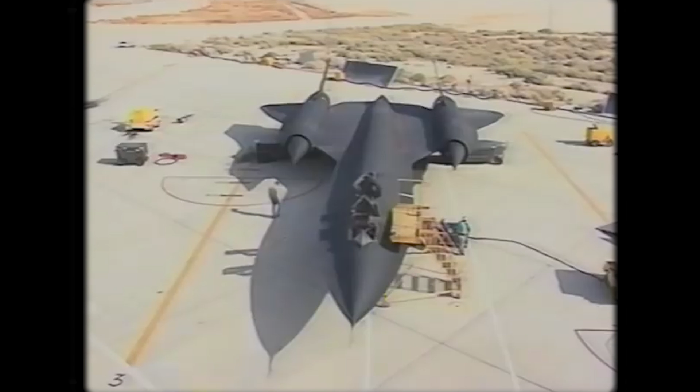The juxtaposition between this dated footage and the futuristic plane is strange. It's hard to believe passengers 40 years ago, in a time when colour TV was a luxury, were flying across the Atlantic at twice the speed of sound. The Concorde was well ahead of its time, an anomaly in the history of commercial travel, a byproduct of misguided government funding, a joint venture between Britain's BAC and France's Aerospatiale, and its development funded entirely by the British and French governments to the tune of $2.8 billion. The Concorde's legacy is marred by its commercial failure, but this engineering marvel was a triumph of ingenuity. Nothing remotely close to it had flown before, and nothing like it has flown since, turning what had been a military-only technology into a luxury flying experience required innovative thinking. This is the insane engineering of the Concorde.

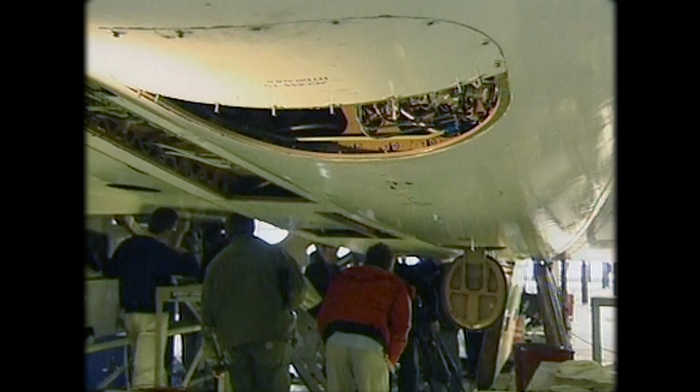The engineers of the Concorde had several unique challenges. Developing a supersonic plane is difficult enough with military design requirements, but developing a supersonic plane that would satisfy the wealthy customers it intended to serve is an entirely different ballgame.

Aerial refueling makes fuel efficiency a secondary concern for the military. The comfort of the plane's passengers is an afterthought at best, and the price tag attached to these often limited-run specialty planes is beyond the budget of a commercial airline. Those needs are reflected in the Concorde's unique design.

A sleek exterior hiding powerful engines, developed from the iconic British warplane, the Avro Vulcan. Fuel efficiency and supersonic flight are two opposing ideas, but these engines, the Rolls-Royce Olympus 593, when flying at Mach 2, were the most efficient engines ever created.

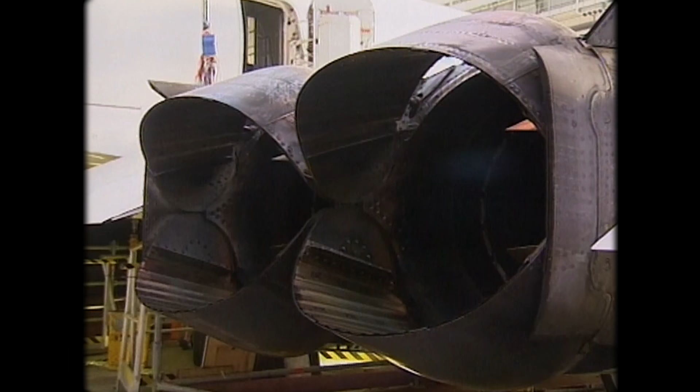These engines, when introduced for the Avro Vulcan, were capable of generating just 49 kilonewtons of thrust, but over the course of their adaptation for use in the Concorde, increased in thrust by over triple to a whopping 169 kilonewtons. 20% of this thrust increase was provided by newly fitted afterburners, a technology typically reserved for military planes.

Afterburners work by injecting fuel directly into the superheated and high-pressure exhaust of the turbine section. Despite this air's journey taking it through the combustion chamber, only half of the oxygen in the air is consumed, leaving untapped energy in the exhaust of these engines. To capture this energy, fuel can be injected directly into the exhaust of the turbines and ignited, basically acting like a rocket stage of the engine, causing further expansion and acceleration of the exhaust through the exhaust nozzle.

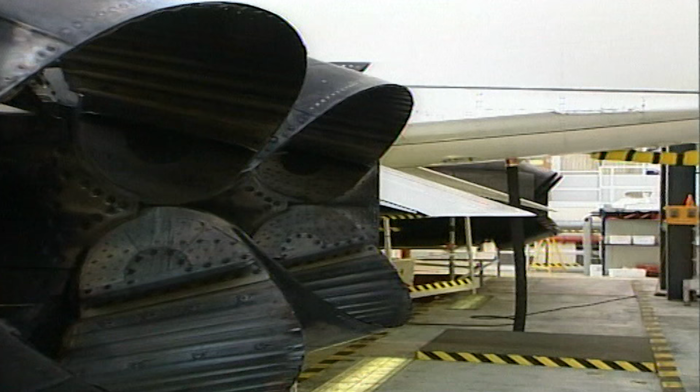However, this system is useless without a controllable nozzle. Typical airliner engines have a fixed nozzle, because these aircraft are expected to be efficient at a relatively low range of subsonic speeds. But the Concorde, with its massive range of speeds, needs not one, but two controllable nozzles to adequately control the engine's power.

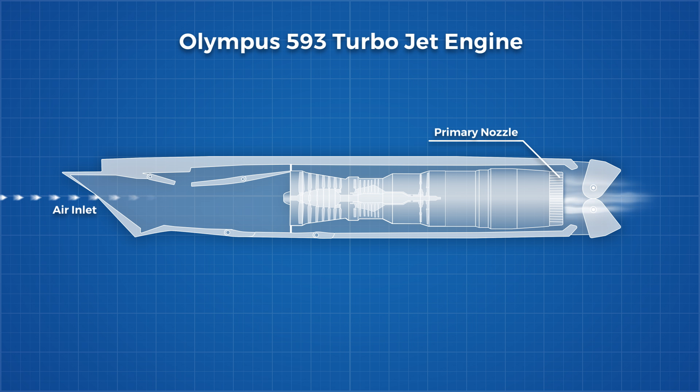The primary nozzle connects directly to the jet pipe's exit and consists of petal-like structures that can close or open to vary the diameter and therefore the area of the jet's exit.

When the afterburner, or reheat as the British engineers called it, was ignited, it caused a massive increase in pressure at the engine's exhaust. This increase in pressure could cause choked flow in the engine, where high pressure zones ahead of lower pressure zones will prevent air from flowing through the engine correctly. To prevent that, the primary nozzle opens wider when the afterburner is active to decrease pressure and ensure the mass flow rate through the engine is unchanged.

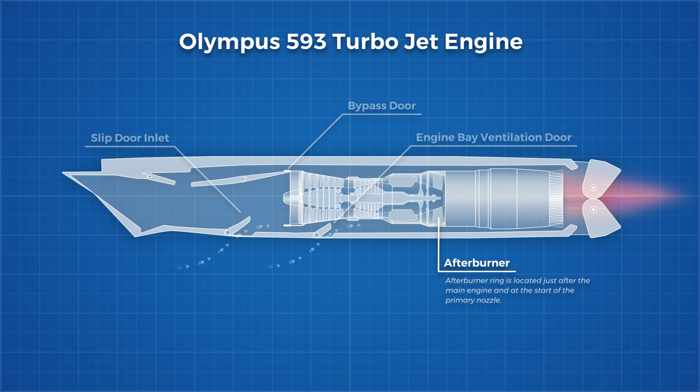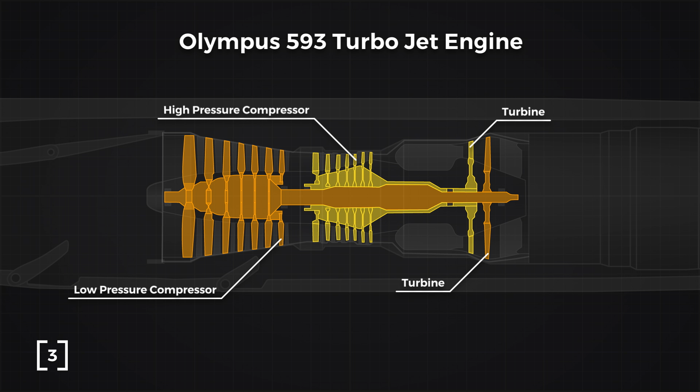However, at times, we do want to affect the flow upstream of the nozzle. The Olympus 593 was one of the world's first two-spool engines, predated only by the Pratt & Whitney J57 engine by just a couple of months. Two-spool means the engine contained two compressor sections driven by two turbine sections, each acting on their own concentric drive shafts, allowing the two sections to operate at different rotational speeds.

When the primary nozzle was actuated, the varying nozzle pressure caused the low-pressure spool to either spin faster or slower, thus providing control of the engine to ensure it can perform at its optimum speed across its wide speed range.

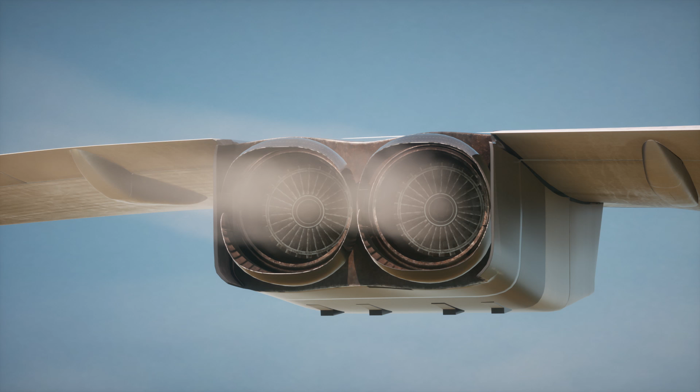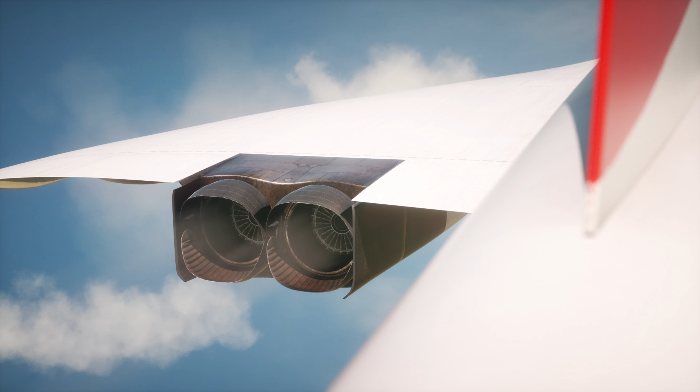The secondary nozzle function is just as complex. The eyelid doors look like some kind of steampunk blast shield, and for good reason. The force these secondary nozzles had to endure influenced their appearance, withstanding huge forces at both supersonic and subsonic speeds, and they could even close completely on landing to function as reverse thrusters.

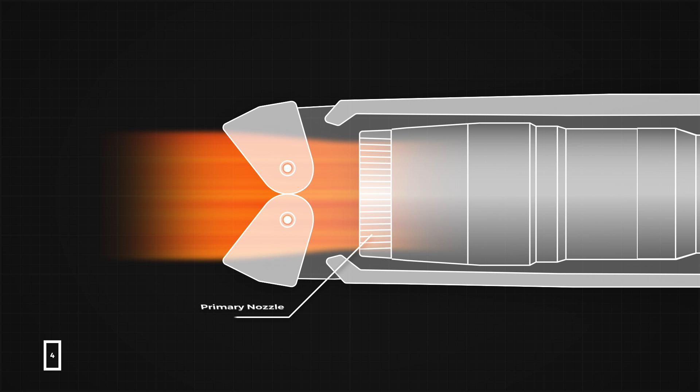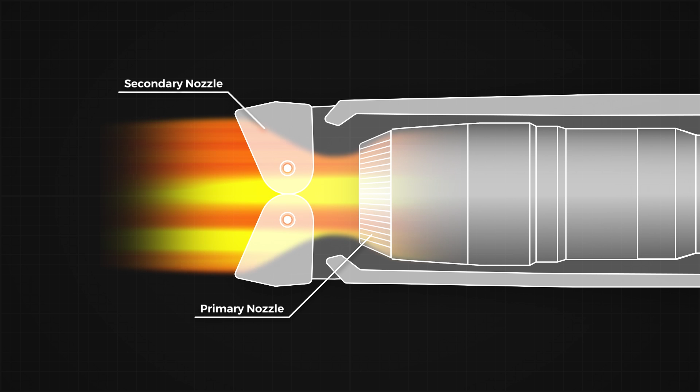By actuating these nozzles, the plane could carefully manipulate the exhaust velocity and thus maximize thrust, because together the pair acted as a controllable converging-diverging nozzle.

Converging-diverging nozzles are typically used in rockets to accelerate the combustion products to their optimum speed and pressure. The opposite shapes are needed because air acts completely differently at subsonic and supersonic speeds.

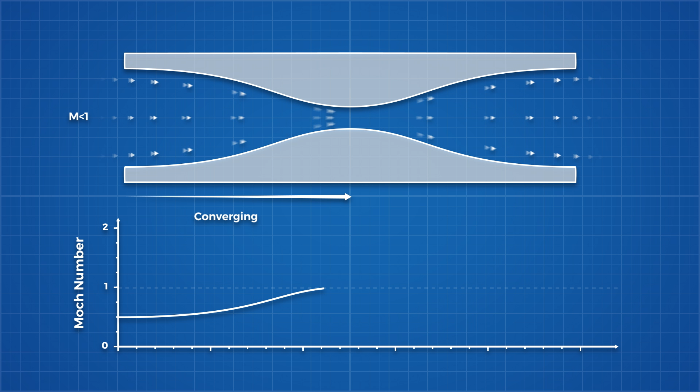For example, when subsonic air travels through a converging duct, it speeds up as the cross-sectional area decreases until some critical area, which is referred to as the throat. This is where Mach 1 would be reached. At this point, no further acceleration of air can occur as the flow is choked.

Now, as you would expect, if that same subsonic airflow went through a diverging duct, the air slows down as the duct area increases. This is Bernoulli's principle at play.

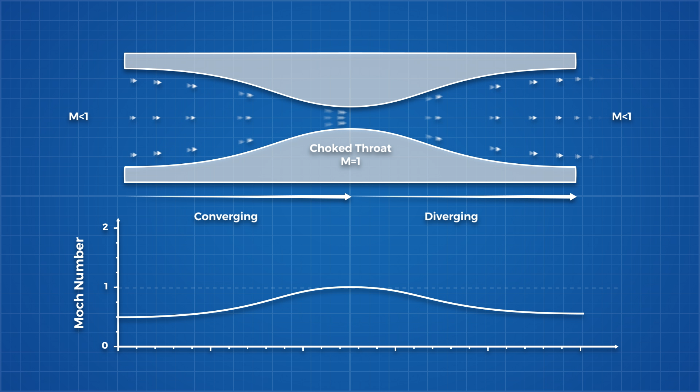The bizarre thing is, the exact opposite occurs when air travels at supersonic speeds. A converging duct will result in a decrease in velocity, and a diverging duct will result in an acceleration.

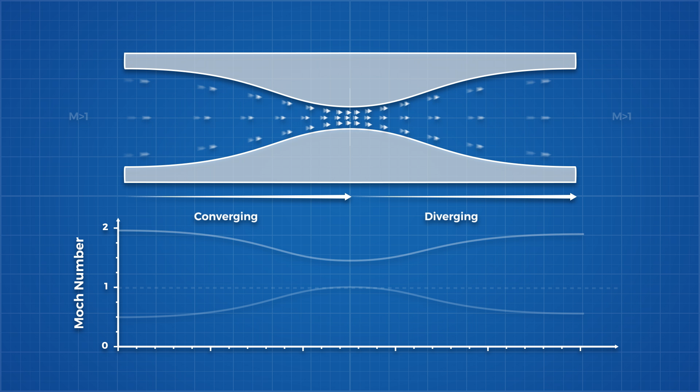So, in order to maximize the acceleration of our exhaust gases, we want to pass our subsonic air from the engine first through a converging nozzle, the primary nozzle, until it reaches Mach 1 at the throat.

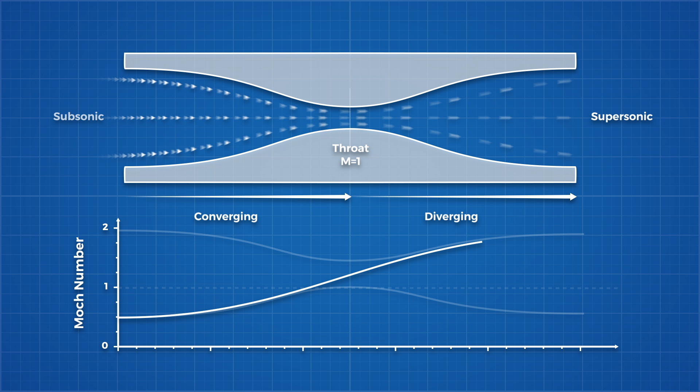Then we want it to pass through a diverging duct, the secondary nozzle, at supersonic speeds so it can continue to accelerate. These paired nozzles allowed the Concorde to carefully optimize the nozzle profile for different flight conditions, a marvelous piece of engineering. The same principles were used for the inlet.

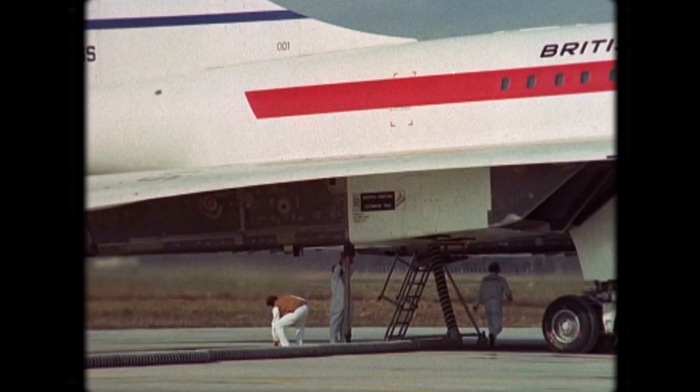No engine can operate with supersonic flow. The shockwaves that would form inside the engine would cause all kinds of chaos. So the Olympus 593 needed some way to decelerate the supersonic air entering its unique square inlets. These squared inlets were designed to simplify the complicated task of creating nice laminar subsonic flow for the engine's compressors.

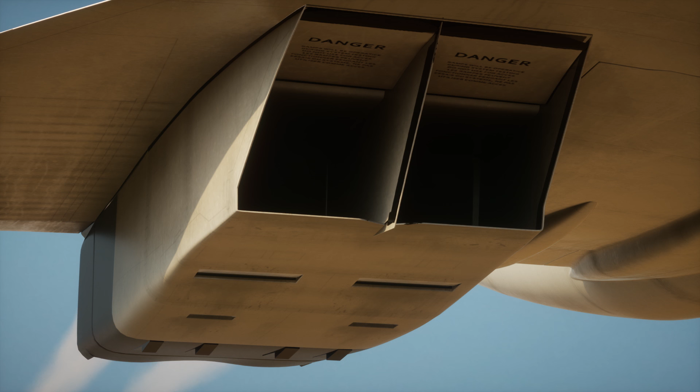Inside were a series of ramps and doors that could open and close depending on the flight regime the intake was encountering. At takeoff, the engines required all the air they could get to accelerate the plane enough to get those cumbersome delta wings to generate enough lift to take off.

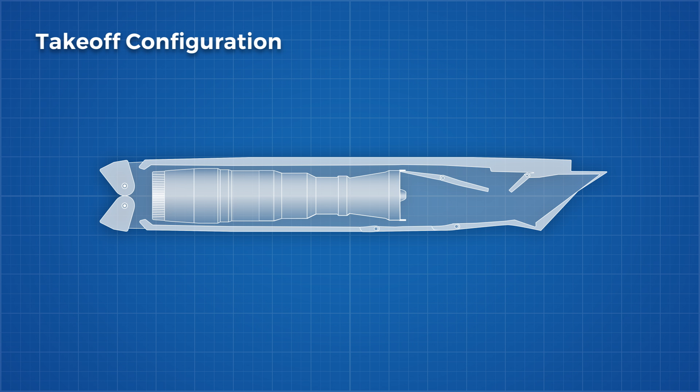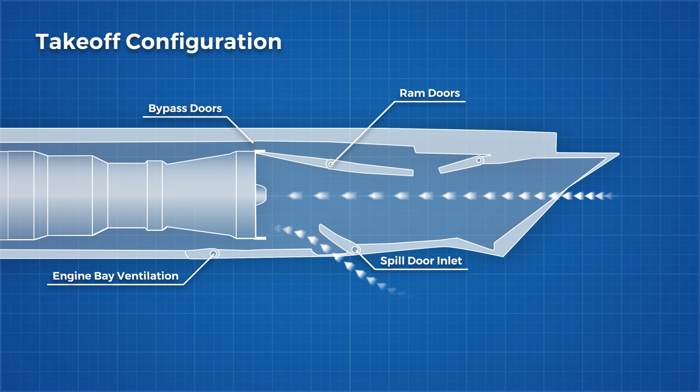To funnel as much air as possible into the engine, the two variable ramps were retracted into their closed position. A spill door in front of the engine intake was held open to allow additional airflow into the engine, while two bypass doors, which controlled the air around the cooling passage around the engine, were also closed.

The afterburners were also active during takeoff, but soon after, the Concorde was required to enter a noise abatement stage of flight, where the afterburners were turned off and power was reduced as the plane climbed.

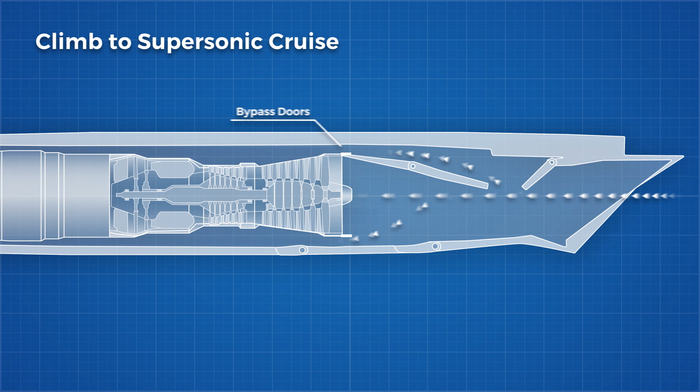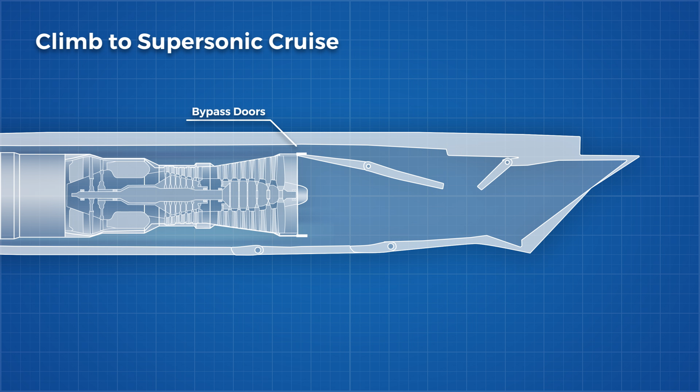At this point, the bypass doors open to allow for cooling air to travel along the outside of the engine. As speed increases, the primary and secondary nozzles adapt, gradually beginning to form the ideal converging-diverging nozzle for supersonic cruise. Parallel to these changes in the nozzles, the inlet ramps actuate to create a converging inlet that slows down and compresses the supersonic air entering the engine.

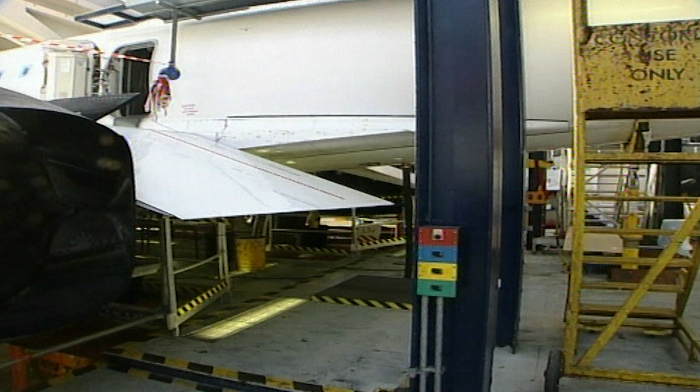The fuel consumption of supersonic flight is massive, but that is primarily driven by aerodynamic drag, not thermal efficiency. This supersonic air being rammed and compressed into the engines helps the engine immensely in achieving its high thermal efficiency.

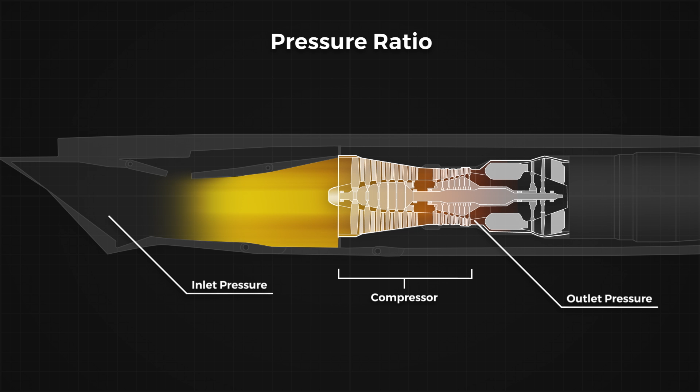Thermal efficiency in jet engines is largely determined by the pressure ratio achieved by the engine. That is the ratio of pressure between the inlet of the engine and the outlet of the compressor, which, in the case of the Concorde flying at cruise, is 80:1, an incredibly high pressure ratio. The highly efficient GEnx engines of the Boeing 787 only manage 58:1.

The Olympus 593's two spools each contained 7 compressor stages, each driven by a single stage turbine.

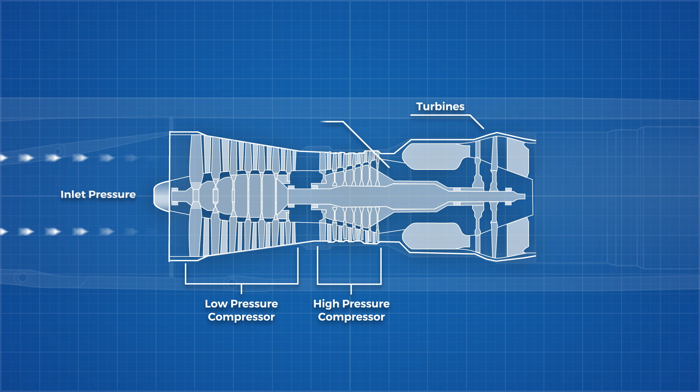The low pressure and high pressure compressors together provided a pressure ratio of 15.5:1, a moderately high pressure ratio that would provide moderate efficiency at subsonic speeds.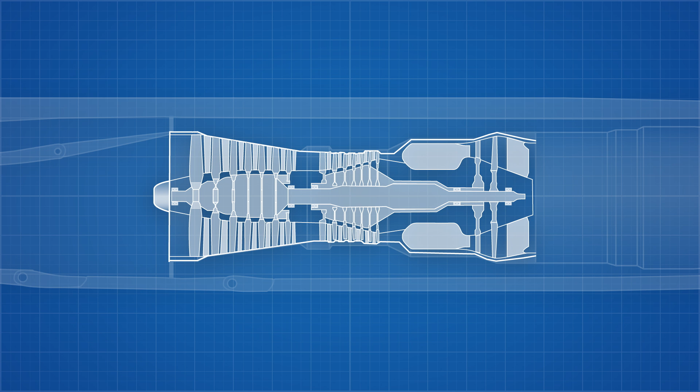However, the pressure ratio multiplied to 80:1 at cruise as the supersonic air rammed into the unique square inlet engines. This elevated pressure ratio resulted in extreme temperatures inside the engine that necessitated the use of high-temperature alloys typically reserved for the turbine blades.

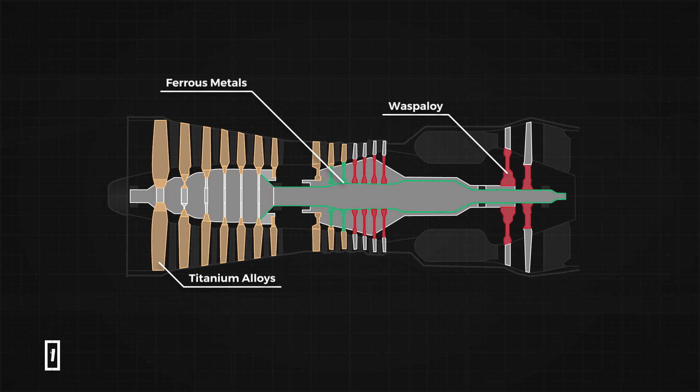Titanium blades were used for the early compressor stages, and high-temperature nickel alloys were used in the even hotter later stages. Cooling the driveshaft bearings became another engineering challenge. Increasing the mass flow rate of cooling oil was not enough to keep the bearings within a safe operating temperature.

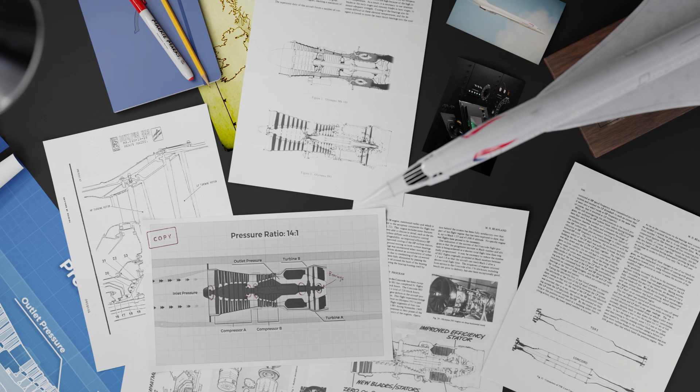Looking at the differences between the original Olympus engines used in the Avro Vulcan and the Concorde hints towards some changes the engineers were forced to make. A center bearing located immediately after the high-pressure compressor here no longer exists in the Olympus 593, and the driveshaft preceding it takes a bottle-like shape, increasing in diameter in the new gap between bearings.

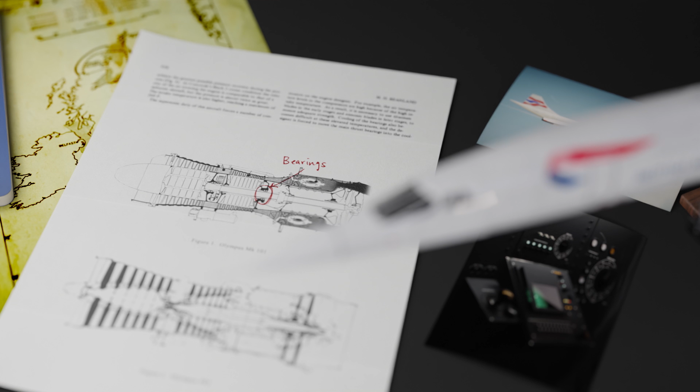This center bearing had to be removed because the temperatures were too high in this location directly after the high-pressure compressor. But without the support of the bearing, the driveshaft became too flexible. To accommodate this change, the driveshaft needed to increase in diameter to increase stiffness.

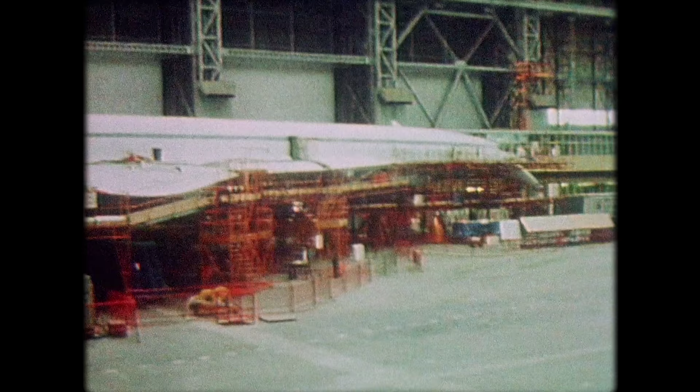The Concorde is full of strange little design details like this, solutions to unique engineering problems caused by the immense cruising speed. In order to decrease fuel consumption as much as possible, the front area of the plane needed to be minimized. Delta wings allow wing spans to be decreased dramatically and reduce the drag created in supersonic flight. However, it creates some issues for low-speed flight, where they struggle to generate enough lift, making takeoffs and landings difficult.

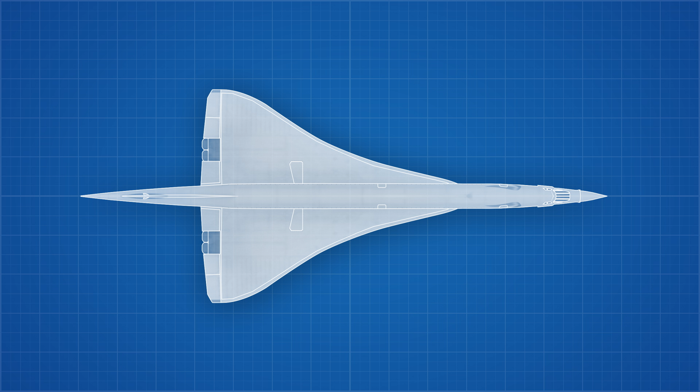This is where the Ogival delta wings of the Concorde come into play. This is a form of compound delta wing where there are 2 sections to the wing, with the forward section having a higher sweep angle than the rear section, connected with an ogee curve, going from concave to convex curves smoothly. This shape allowed the Concorde to generate additional lift at low speeds through the use of vortex lift.

When flying at high angles of attack, separated airflow would roll over the wings to form 2 stable cone-shaped vortices, where airspeeds were high and air pressure was low, effectively creating lift.

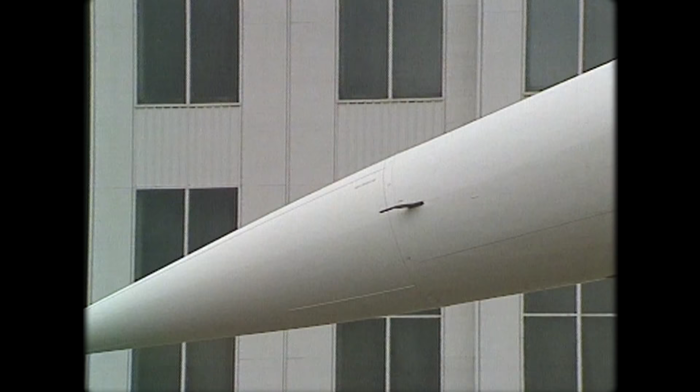However, those high angles of attack needed for low speeds created some serious visibility problems for the pilots, whose cockpit would have had a lovely view of the sky if not for the iconic droop snoot. The droop snoot is a one-of-a-kind solution, a mechanized nose that could drop by 12.5 degrees to provide the pilots a clear view of the runway during these high angle of attack maneuvers.

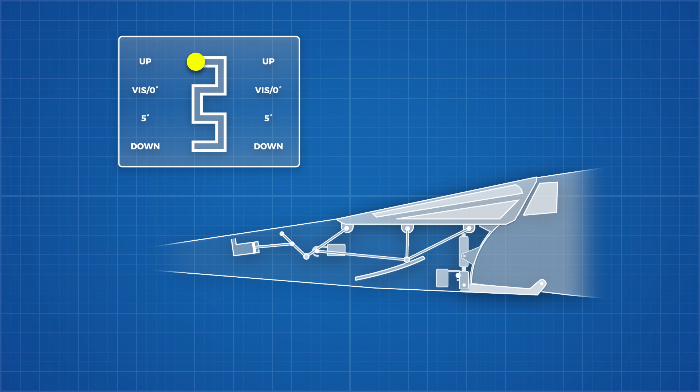The mechanism had 4 positions, controlled by the pilot with this lever. The top position was the fully retracted position used in supersonic flight.

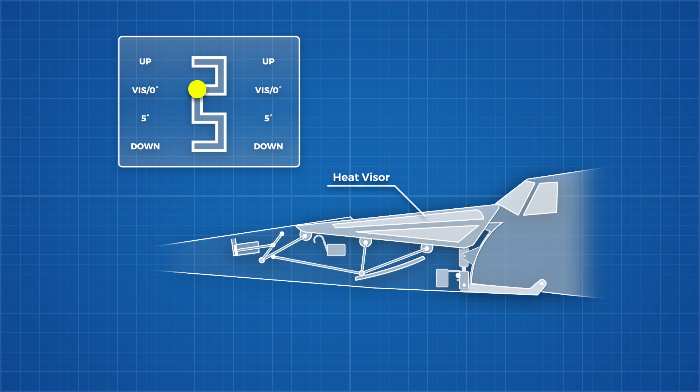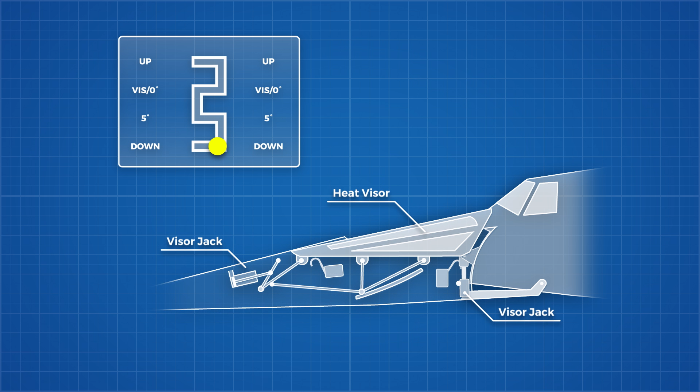The second position lowered a specialized heat shield visor used to protect the cabin windows from the heat of supersonic flight. When placed in this position, the visor hydraulic actuator would retract, causing the visor to retract into the nose fairing. The next position was the 5-degree down position used for takeoffs and taxis, extending this hydraulic actuator, and the final setting pushes the nose down further into the 12.5-degree setting needed for landings.

The plane also had an extendable tail landing gear, which on most takeoffs and landings was not needed, but was present to protect the plane's engines, which would be the first point of contact for what would normally be a tail strike for other airliners.

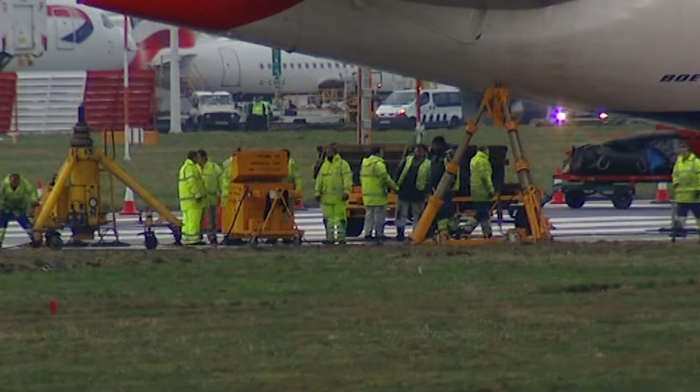Tail strikes aren't all that uncommon, usually happening on landings in difficult conditions. Some planes, like the 777, also have extendable protection measures in the form of tail skids, as a strike can, at best, force a plane into maintenance, costing the airline company money, or, at worst, cause serious damage to the pressure bulkhead and put the lives of the passengers aboard at risk.

In fact, a tail strike is responsible for the crash that claimed the most lives out of any single aviation crash in history. In 1985, a Japan Airlines 747 flight crashed in the mountains of Japan, 7 years after a tail strike had occurred, which had not been correctly repaired. With the high angles of attack demanded by the Concorde for landings, this protection was vital to keep the plane safe.

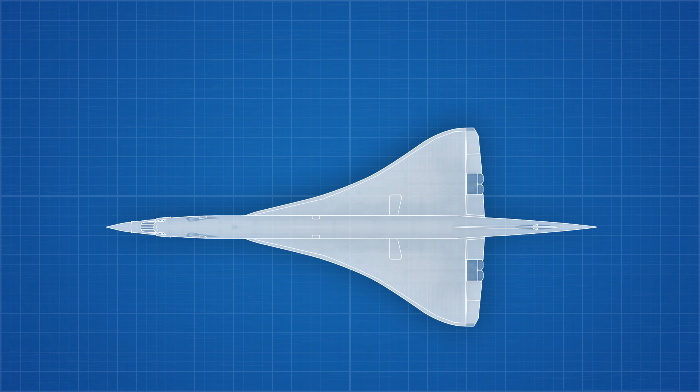The visor was needed during supersonic flight because the nose of the plane experienced temperatures of around 130 degrees Celsius, while cruising at an altitude of 60,000 feet, where ambient temperatures are usually around minus 56 degrees Celsius.

The Concorde went through several design iterations with this forward-facing protection. The earliest prototypes simply removed the lower forward-facing windows completely. But it turned out that pilots like having a view of where they are going, so this wasn't an option for the full production model.

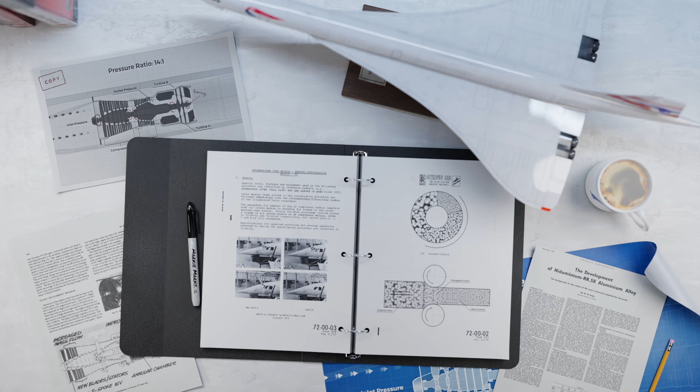However, a version of the droop snoot with a fully metal heat shield was originally considered for the Concorde, which would have eliminated forward visibility during cruise, which was considered non-essential. But thankfully, these heat-resistant glass visors were used in the final version.

Working with such high temperature variations between takeoff and landing causes some serious structural issues, especially with the frequency of flights needed to make a commercial plane financially viable. The thermal expansion caused by these temperatures made the plane grow by 20 centimeters on each and every flight. The fatigue this thermal stress could cause would eventually result in catastrophic failure if not properly accounted for.

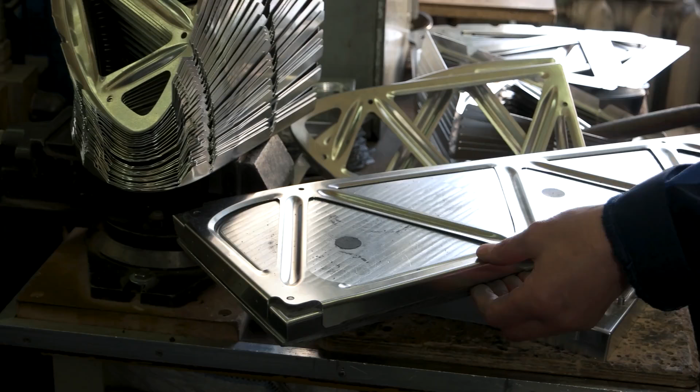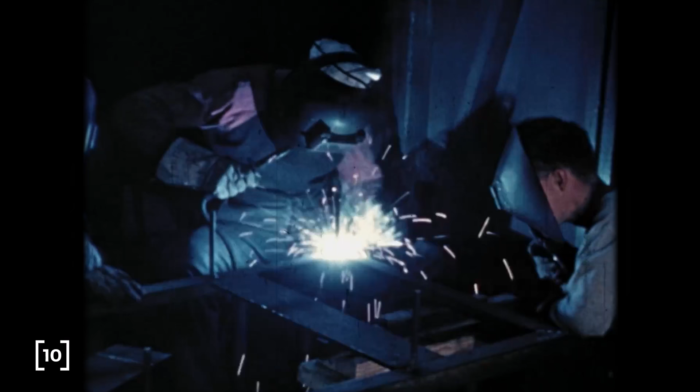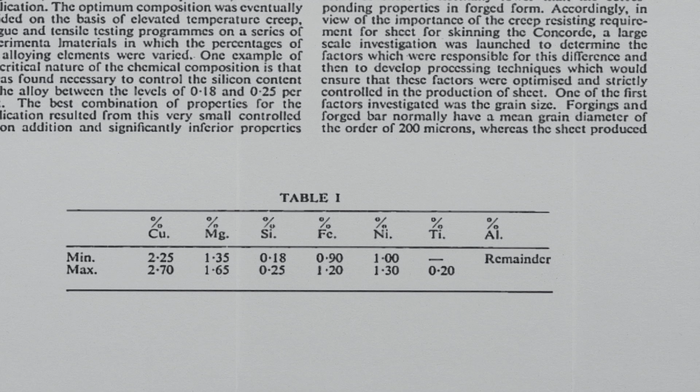The first issue was finding a material capable of dealing with this heat. Titanium, which was used for the SR-71, could have been used, but due to its cost and weight was ruled out early. Traditional aluminium would not be capable of withstanding these conditions, but a special aluminium alloy, Hiduminium RR58, developed in Britain during World War II for the newly invented gas turbine engines, could. The alloy consists of copper, magnesium, silicon, iron, nickel, and titanium, with the remaining percent being made up of aluminium.

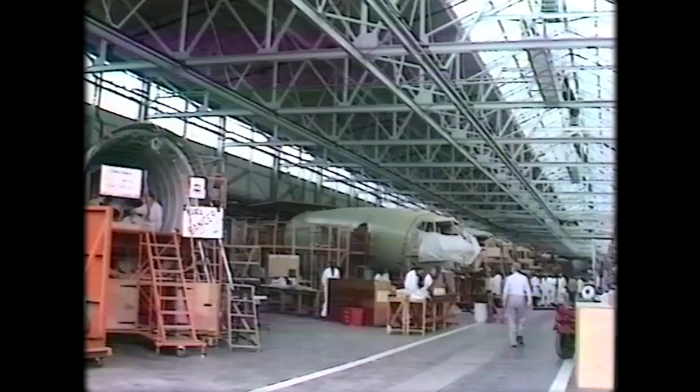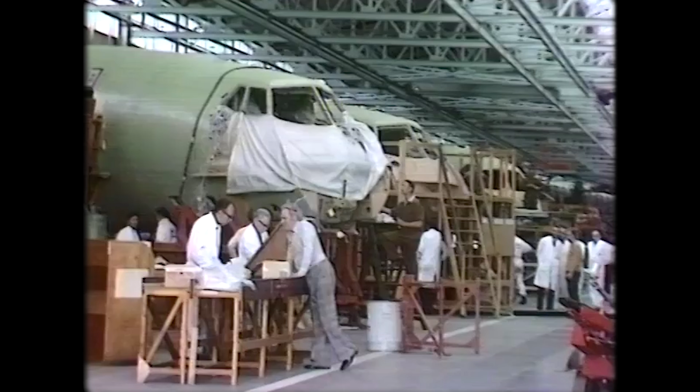Although this material had been developed decades prior to the Concorde, it had never been used in this application. With lower average temperatures than its traditional use inside gas turbine engines, but much longer life requirements, the parts would also be manufactured using different techniques, like the cold-rolled sheets needed for the fuselage. This one process alone affected critical material properties that reduced heat resistance.

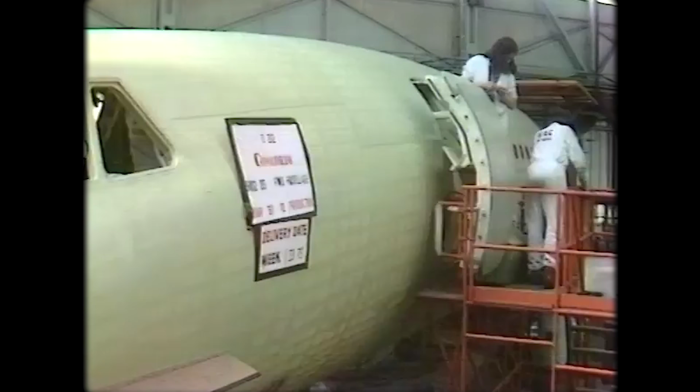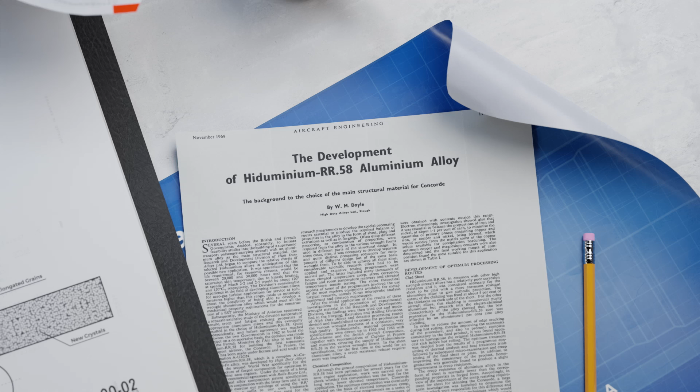Forged parts tend to have larger crystal grain structures than rolled components, which helps forged components resist the internal crystal structure from creeping when under stress and heat. To adapt this material for the cold-rolled skin of the Concorde, the engineers at Rolls-Royce had to develop new manufacturing methods to maximize the grain size of these cold-rolled components. Manufacturing knowledge that has no doubt been used by Rolls-Royce for modern-day applications.

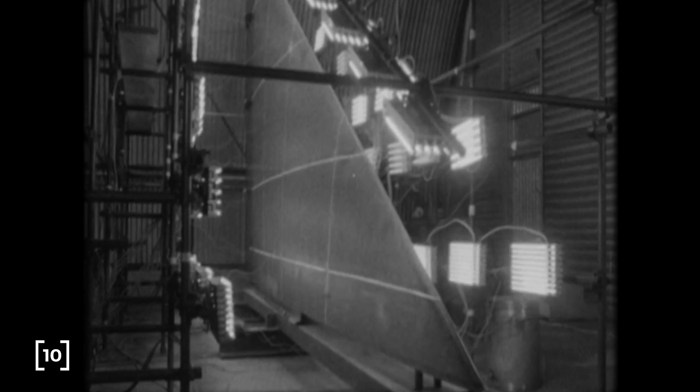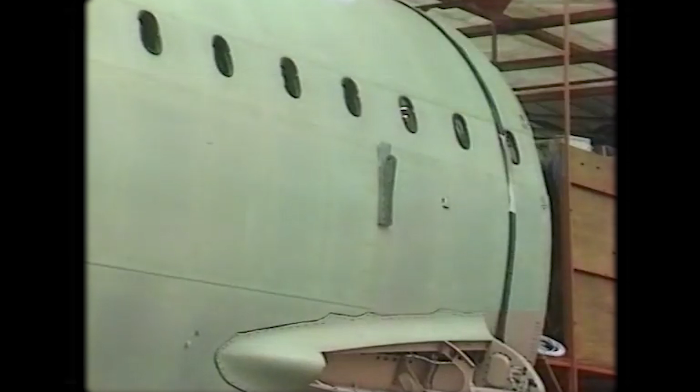Now that a suitable material had been developed, shaping it in a way that allowed expansion was crucial. Most of this expansion was imperceptible to the crew and passengers of the Concorde. Interior panels could slide past each other to hide the expansion to the passengers, and crucially prevented stress forming as a result of uneven expansion between the hot exterior and cool interior.

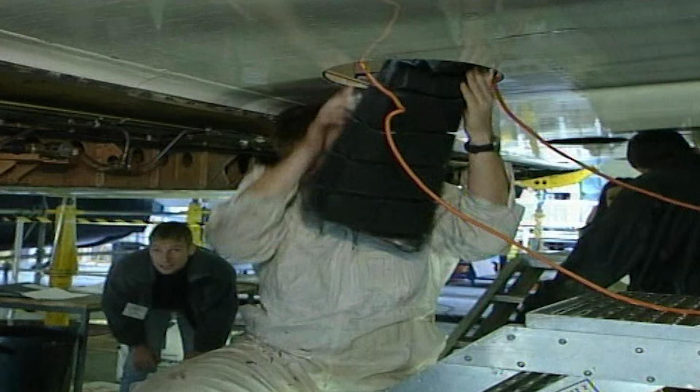Wiring around the plane was given slack to prevent the wiring from snapping as the plane expanded, and many components around the plane were corrugated, meaning parts were given a curved shape. This allowed these parts to stretch and flatten the curves like a spring.

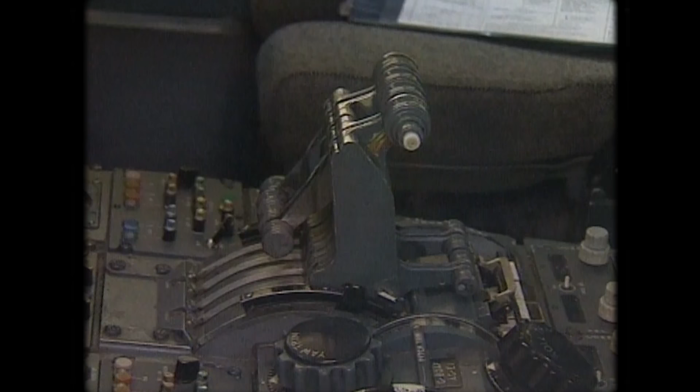However, one expansion gap was quite obvious to the crew of the Concorde. As the flight approached its cruise speed, a gap between the flight engineer's console and the cockpit bulkhead began to form, a gap large enough to slide your hand inside of. Or, as became tradition for retiring Concordes, the flight engineer's cap would be placed inside the gap as it closed, leaving it permanently wedged.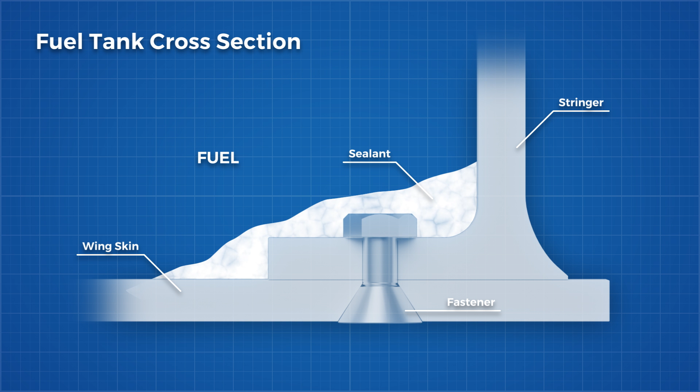Like the SR-71, this continual expansion and contraction cycle caused some serious issues with fuel tank sealants. In order to deal with the expansion cycles, a sealant needs to be flexible. Even mundane plastic sealants on household windows need this quality to prevent small movements from allowing drafts getting through. The issue is that high temperatures tend to harden sealants over time, and then, as the expansion cycles continue, the sealants begin to crack and allow fuel to spill out.

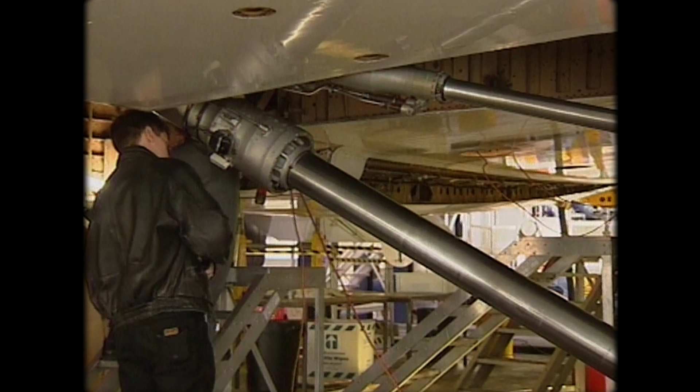While the temperatures the Concorde experienced were vastly lower than the SR-71, it was still a maintenance issue. The Concorde used a high-temperature sealant called Viton, but even this sealant hardened and cracked over time, and so, approximately every 1,100 flying hours, roughly once a year, the Concorde was forced into maintenance, which could take 3 weeks to complete. Maintaining the Viton seals was one of the many procedures needed. Fuel tanks would be emptied and then vented for 24 hours to allow technicians to climb inside and manually inspect and replace sealant.

This was a massive job and often required the technicians to work with just touch, as access to tanks 5A and 7A on the outermost part of the wing was impossible.

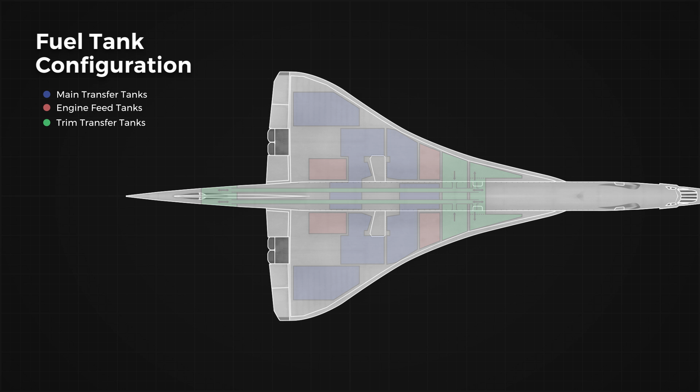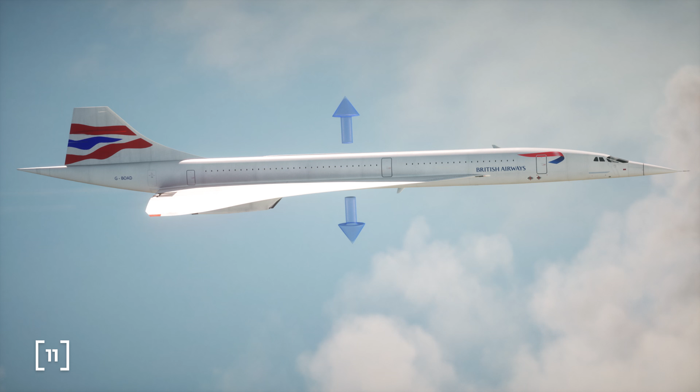These fuel tanks played a vital role in control of the plane too. As speed increases, the centre of pressure of a wing, the point through which all lifting force acts, tends to move backwards. This is usually not a significant issue for slower commercial airliners, but the Concorde's centre of pressure moved back by as much as 1.8 meters, more than enough to cause significant control issues that would push the plane into a nosedive if not accounted for.

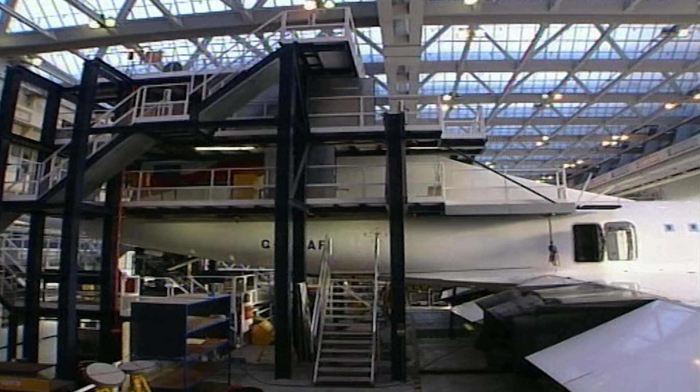Usually, such a shift would be counteracted by the elevator, which could stabilize the aircraft in pitch from changes in the center of pressure. But Concorde did not have a horizontal tail, and adding elevons on the wing big enough to counteract this change would have resulted in high levels of trim drag at such high speeds.

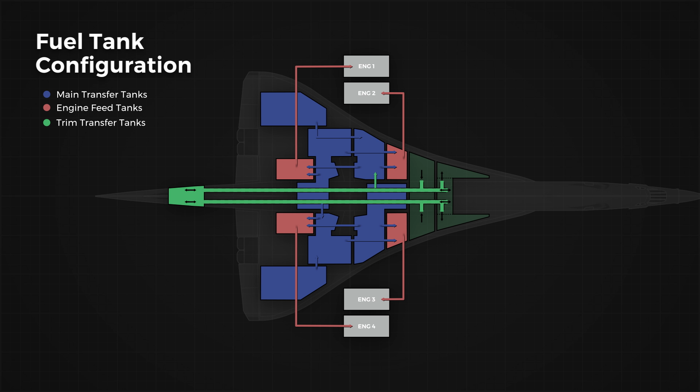So Concorde engineers instead used the huge tanks they had at their disposal to deal with this issue. As the plane approached Mach 2, fuel would begin to be pumped out of the forward trim tanks and into the rear trim tanks and collector tanks in the wing, moving up to 20 tons of fuel rearwards and shifting the center of gravity backwards to match the shift in center of pressure, keeping the plane balanced without adding any additional drag with control surfaces, an elegant solution using the tools at hand.

The Concorde is an icon in the history of aviation. I can't help but feel an odd sense of nostalgia for a plane I never got to fly in. Hundreds of thousands of passengers can see one of the last remaining Concordes while arriving and departing from Heathrow.

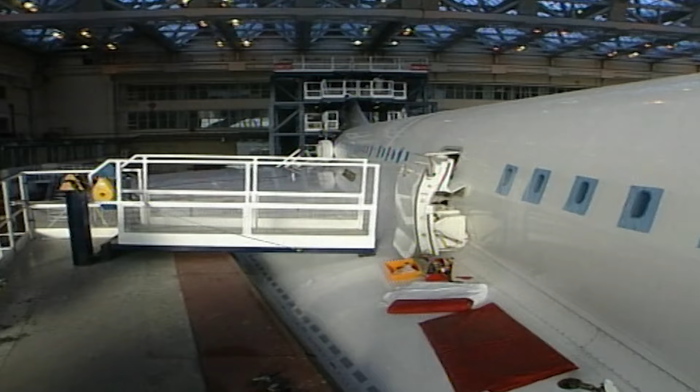Nicknamed Alpha Bravo, this Concorde made its last flight a month after the tragic loss of Air France 4590. It was undergoing major interior upgrades when the decision to retire all Concordes was made, stranding the plane there indefinitely. Alpha Bravo has been in limbo ever since, never getting to undergo the planned upgrades to prevent another disaster like Air France 4590 from ever happening again. An unintentional monument to Britain's storied history in aviation.

Accidental monuments like this are scattered all across Britain. Gigantic, no longer functional radar towers can be found all over Britain. These towers were among the first radar systems ever constructed and played a vital role in the defence of Britain during the Battle of Britain, a system that the Germans vastly underestimated, thanks to not just the technology, but the logistical and strategic systems that supported them.